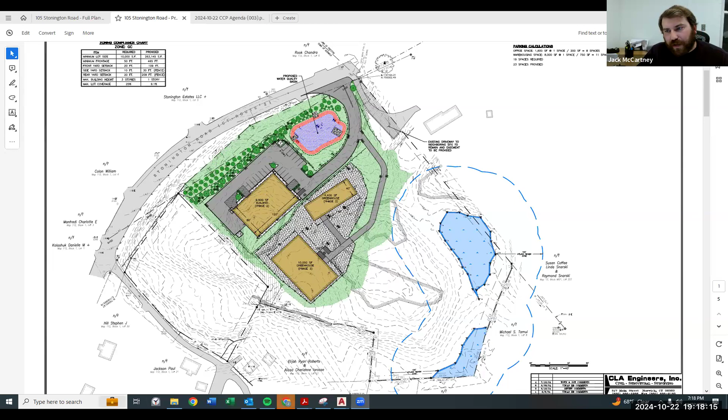But Jack, if you didn't mind showing where that landscape buffer reduction was. Yeah, we actually were not- did you end up not needing that? Yeah, at the last meeting, I thought we- it was a carryover from my previous memo. Yeah, if you see, we pulled the whole building and the parking lot back and we were able to get that 50-foot buffer.

Okay, thank you. And then sheet 4, did you address that dumpster and enclosure on the site plan for the phase 1? Yeah, we got the dumpster enclosure on here. I uploaded the plans to the portal, I think 2 or 3 days ago. Okay, thank you, I'm sorry I missed that. So those items from this memo have been addressed.

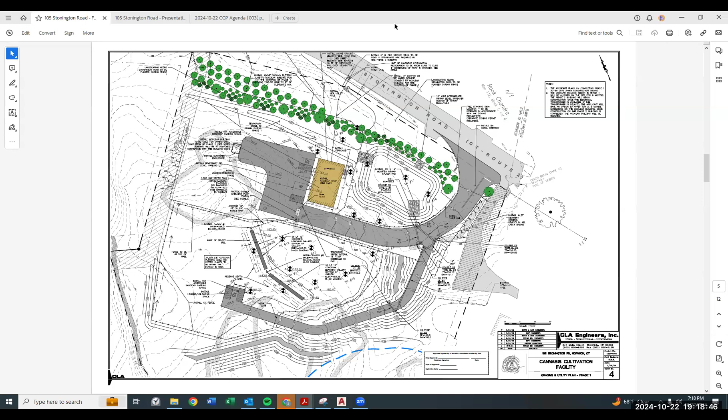So that's it. What about Mr. Bo? We're going to talk about the fertigation issue.

Yep, I will share my screen again so I can go through a letter. I'm just curious if Preston is represented here tonight. I am here. I'm gonna speak. You're not gonna let me speak. And I'm just wondering, because you moved up to the fertigation plan, okay.

Have all the issues in the Preston letter, have they all been addressed already? Preston had responded to the last iteration of their memo and had comments, and then Connie, this is what she's trying to do now, is address them. So this is where she's at. So the commission has the authority to determine whether those have been addressed or not based on what she provides.

That'd be memo 4. In my memo 4, which talks about number 4, was that to provide additional information in response to what you were hearing. Well, I think it needs to be clear for the commission that those concerns that Jerry has brought up are concerns of the town of Preston. They're not requirements of our zoning regulation. Only that you meet standards, certain standards, but you have to determine if the applicant has met those standards or not by what they're providing. So what I'm saying is, just because somebody raises an issue doesn't mean it's something that is not in compliance with our zoning.

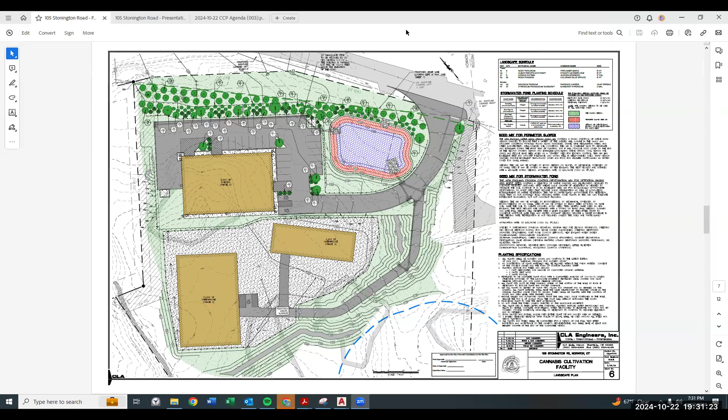Any other questions? Anything else from the applicant? Okay, so now, is there anybody else wishing to speak in favor of the application? Anybody else wishing to speak in favor? Okay, anybody wishing to speak in opposition to the application?

I'll speak in opposition to the application. My name is Jerry Gavarik. I'm also a selectman in the town of Preston, a lifelong dairy farmer, and own property one property away from this proposed marijuana grow facility. I took it upon myself to contact the town of Morris's first select person, Thomas Waite, who was also a former family farmer like myself.

He told me that for 3 to 4 weeks, when the plants are blooming, it's like 20 skunks are squished on the highway in front of your house—that's what it smells like. And I have to believe the guy; this is what he told me, why would he lie to me? He said an adjoining property owner next to that site is afraid she wants to sell a house, and she's afraid she can't sell it because the odor is so bad.

It's bad for about a month out of the year. I know it's not going to be odor all the time, but for these people to get up there and say there's going to be no odor—when I asked them about the aromatic plants to offset the smell, he laughed. That's what his response was. The first selectman of Morris laughed.

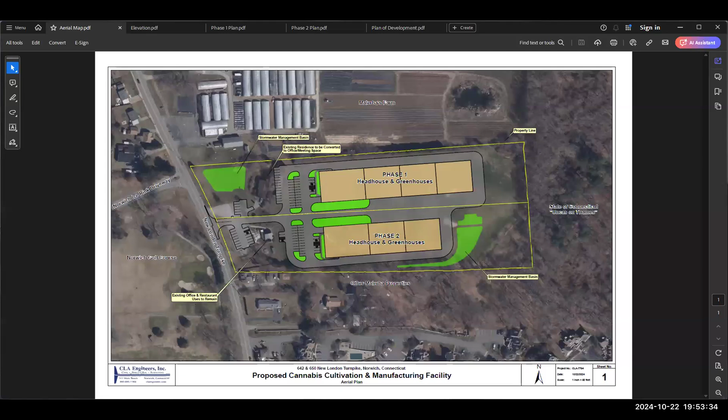Here tonight on behalf of the applicant, Turnkey Real Estate. If I could share my screen, I can show some exhibits to you guys. Sure thing, go ahead. Can you guys see that? Not yet, not yet. Okay, it's up on the screen now. Okay, perfect, thank you.

As I said, I'm Kyle Haubert from CLA, here tonight on behalf of Turnkey Real Estate LLC, the applicant for this project, here tonight for proposed advanced manufacturing and cultivation of cannabis products. The project will be located at 642 and 650 New London Turnpike, which are these properties right here. To orient you guys, New London Turnpike is running down the left side of the sheet here.

The properties are 4.9 and 4.92 acres respectively, currently used primarily for Malerba's driving range. That would be the bulk of the property here. You also might be familiar with the Millie's ice cream shop, located in this building right here. There's also a rental residence located right here on this property as well.

Surrounding the two parcels, to the north we have Malerba's farm - you can see the farm fields and greenhouses. To the east is a property of the state of Connecticut, the Uncas on the Thames complex. To the west there's a portion of the Norwich Golf Course as well as the Norwich Ice Rink. And finally, to the south are other properties of the Malerba family.

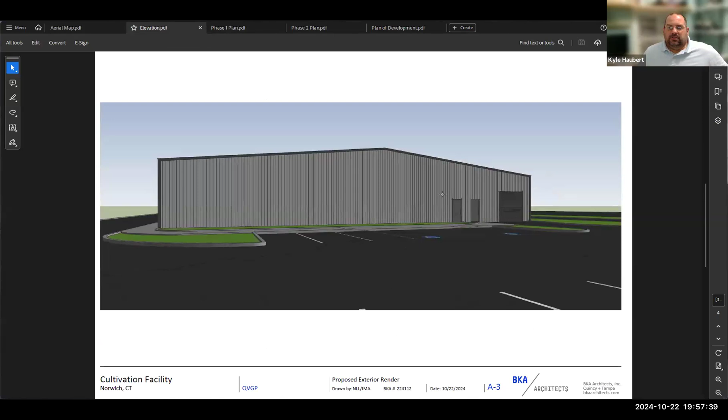I can show you a rendering of the building elevations for phase 1. You can see the front end would be a metal building. This would be the main loading access to the property and building, as well as man doors for entering and exiting. This is the facade of the building facing towards New London Turnpike, and then the row of greenhouses further behind the head house - this would be the head house here in the distance.

Phase 2 of the project would be very similar to phase 1. The head house would be an identical building located to the south of the phase 1 development. The only difference is that phase 2 would only have 2 greenhouses stacked behind the head house.

In total, all the buildings, including a reuse of the existing buildings, are about 99,180 square feet of building. I'd like to note that all of the growing operations will be done indoors within these greenhouses for both phase 1 and phase 2.

After I go through the site plan and step through it, I'll pass to Michael Pierpont and David Weber from Quinnipiac Valley and Turnkey Realty, and they'll go over some of the operations and how their operations work within their buildings.

I'll go through access to the site. This would be the main access, here to the west off of New London Turnpike. We have relocated the driveway entrance slightly south from where it exists currently for the driving range and the ice cream shop, for 2 reasons: this allows direct access straight through the site for the facility, and shifting the entrance south improves the sight lines when exiting the driveway. If you're familiar with that area, looking south there's a relatively short sight line now, but moving this driveway further south expands that sight line so we can meet the guidelines.

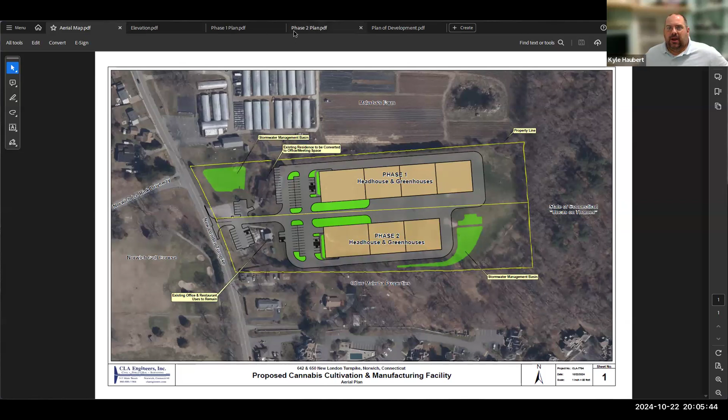On this aerial map: stormwater from the north, from Malerba's farm, as well as from the east along the steep embankment on the state property for Uncas on the Thames, all flows through the property and is directed to a low point about midway down the southern property line. What we've proposed is to collect and divert the stormwater from those surrounding areas. Stormwater from the north and east will be collected in a 5-foot wide grass swale that will divert that flow around the development to the southern property line, just like it does now.

This basin has riprap plunge pools at the discharges from the stormwater systems to help slow down velocity and capture that first flush of sediment. There's also a forebay worked into the system here, again to cleanse that initial first flush of sediment and fluids that run off from the parking lot. That stormwater then continues to filter through the remainder of the water quality basin to a discharge area at the southern property line, right about the same location where stormwater currently exits the site and continues southerly.

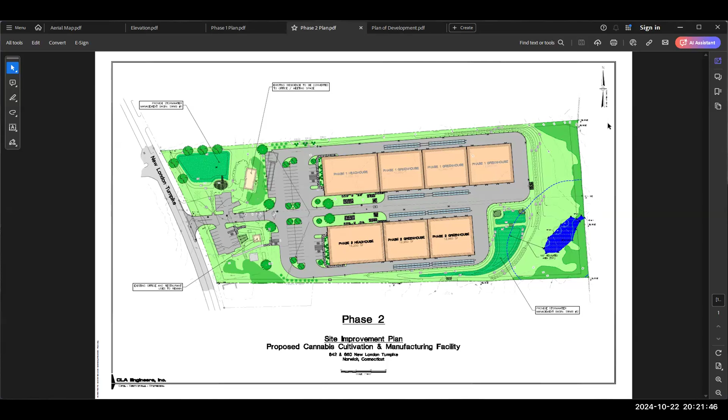Let me see. Or I can bring them up if you need me to. Yeah, would you mind, Dan, if you have those handy? Yep.

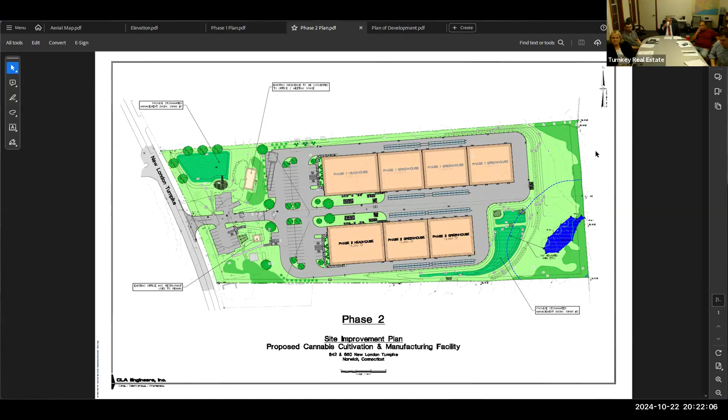Perfect, thank you. The first item in the special permit criteria, 7.7.6.1, the proposed use must be consistent with the current Norwich Plan of Conservation and Development.

The proposed development is consistent with this. It provides for aesthetics, lighting improvements, and the parking facility will reduce visual and parked vehicle clutter along the London Turnpike, consistent with the planning themes. Additionally, it will provide additional value to the grand list, which will generate additional funds usable for municipal projects and the school system within Norwich. The facility offers competitive pay, stable employment, and training opportunities, which help Norwich develop its nascent cannabis business community.

The next section, 7.7.6.2: the location, size of the site, nature and intensity of the operation involved and conducted in the use, and the location of the site with respect to the streets giving access to it, must be such that the use will be in harmony with the appropriate and orderly development of the district in which it is located and will promote the welfare of the city.

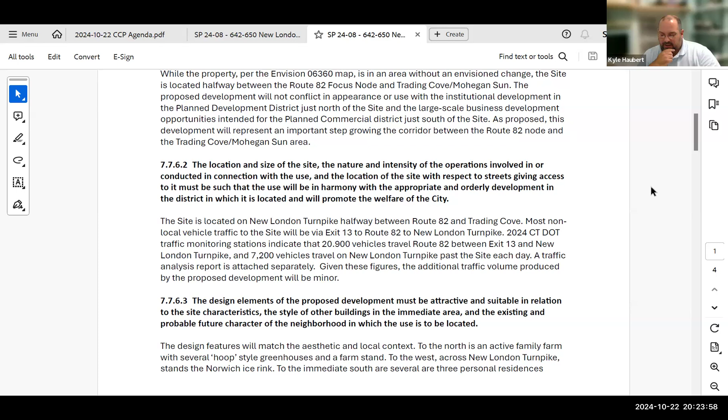Firstly, the site's located on the London Turnpike between Route 82 and Route 32 and Trading Cove. New London Turnpike has more than enough vehicle capacity for the site and for the proposed use. It's also in harmony with the neighborhood. You'll remember back at the aerial plan that I had, the Malerba's farm and farm stand is located just north, which is a very similar use to the cannabis facility.

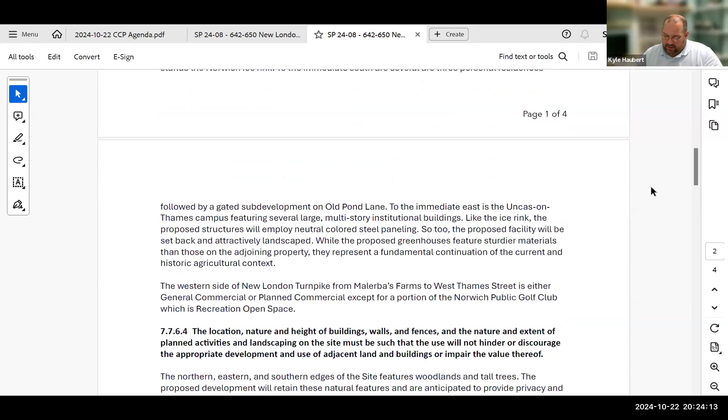The next section, 7.7.6.3: the design elements of the proposed development must be attractive and suitable in relation to the site characteristics, the style of the buildings in the immediate area, and the existing and probable future character of the neighborhood in which it is located.

Again, the design features: it's a greenhouse space, it's a metal building. The Norwich ice rink across the street is a metal building. Also, the greenhouses at the Malerba's facility to the north of this are very similar in characteristics. So this is not out of character and fits in with the character of the neighborhood.

The location, nature, and heights of the buildings, walls, fences, and the nature and extent of the planned activities and landscaping on the site must be such that the use will not hinder or discourage the appropriate development and use of adjacent land or buildings or impair the value thereof.

Again, this building and facility meets the character of the neighborhood. The height of the building will be about 22 feet at the peak, so it fits in with the surrounding buildings and the scale of buildings around it. To the north is the Malerba's Farm, and to the east is a steep embankment that's heavily wooded, belonging to the state and the Uncas on the Thames property. So development on this site does not inhibit any development or impair anything elsewhere or impair the value of anything surrounding.

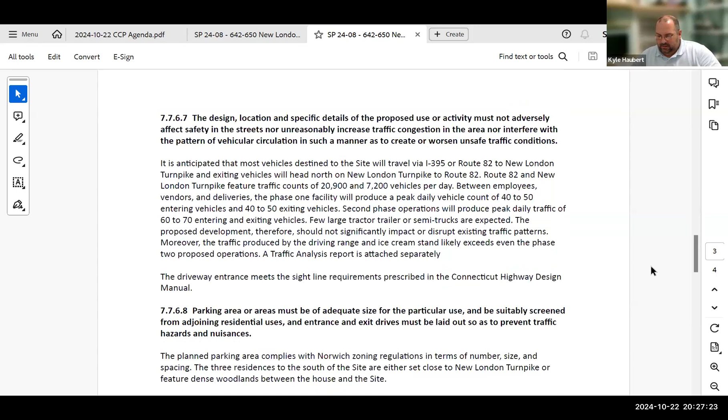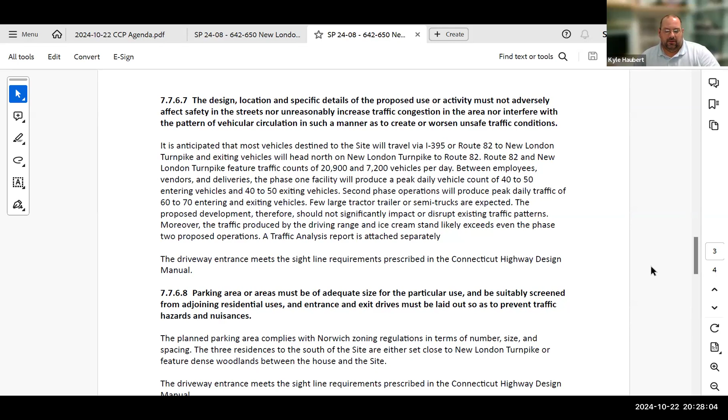Next, the design, location, and specific details of the proposed use or activity must not adversely affect safety in the streets, nor unreasonably increase traffic congestion in the area, nor interfere with the pattern of vehicular circulation in such a manner as to create or worsen unsafe traffic conditions. As previously noted, we have provided a traffic analysis that indicates the anticipated number of employees and trips per day on New London Turnpike, and it found that there's no negative impact on traffic there. The entrance drive has been designed with radii on all corners to allow for traffic and trucks to enter and exit the property.

The parking area or areas must be of adequate size for the particular use and be suitably screened from adjoining residential uses, and entrance and exit drives must be laid out to prevent traffic hazards and nuisances. As I just noted about the entrance drive, there are adequate radii on each corner to allow safe traffic in and out of the parking area. The parking area is designed to meet zoning regulations—the number of spaces and sizes of the parking spaces meet the zoning regulations. We've provided screening within and around the parking area with landscaping, and we've tried to preserve the natural mature landscape that exists around it as best we can.

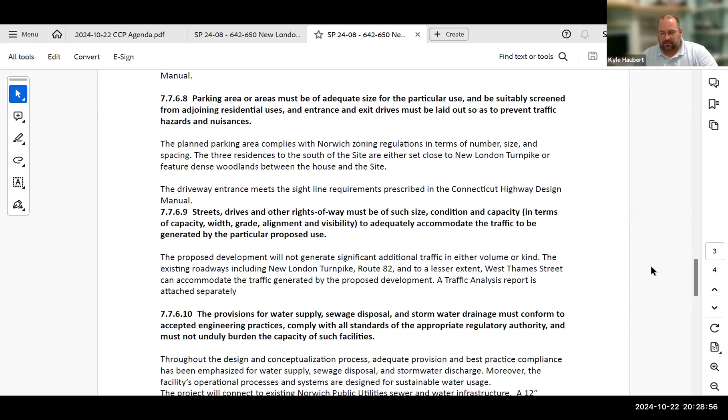Next, streets, drives, and other rights of way must be of such size, condition, and capacity in terms of width, grade, alignment, and visibility to adequately accommodate the traffic generated by the particular use. Again, the direct exit from the facility onto New London Turnpike—we've run the traffic analysis on that—shows it has more than adequate capacity to handle the development, as well as the roads further down, whether it's Route 82 to the west or Route 32 to the south. Both of those state roadways have more than adequate capacity to accommodate any of this development.

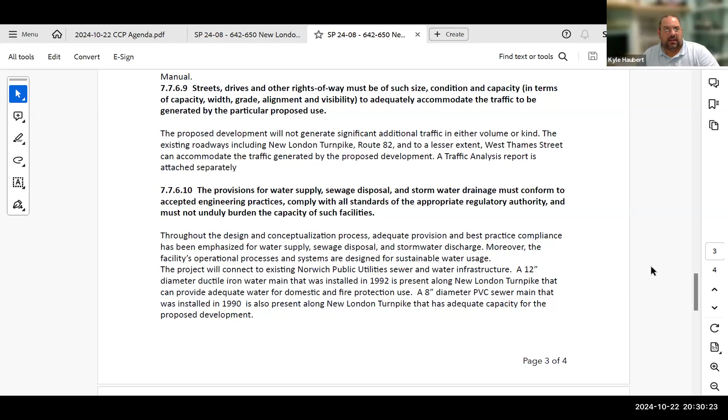Next, the provisions for water supply, sewage disposal, and stormwater drainage must conform to accepted engineering practices, comply with all standards of the appropriate regulatory authority, and must not unduly burden the capacity of such facilities. Again, Norwich Public Utilities has sewer, water, gas, and electric facilities in New London Turnpike. They have reviewed these plans, and there is capacity for this development with the utilities. We've also done the stormwater drainage analysis, which complies with both the city and the DEEP 2024 Stormwater Quality Manual, and the city engineer has reviewed and approved those stormwater measures.

The proposed use must provide easy accessibility for fire apparatus and police protection, and must be laid out and equipped to further the provision of emergency services. We've laid out the driveway as basically a straight shot from New London Turnpike directly into the facility. The gate will have automatic permit for emergency access for fire, police, and ambulances to reach the facility. We've also provided a hydrant in the middle of the parking lot for fire apparatus to tie into should a fire occur, and there's more than adequate width of the travelways around the buildings for emergency vehicles to fully circle the buildings in both phases.

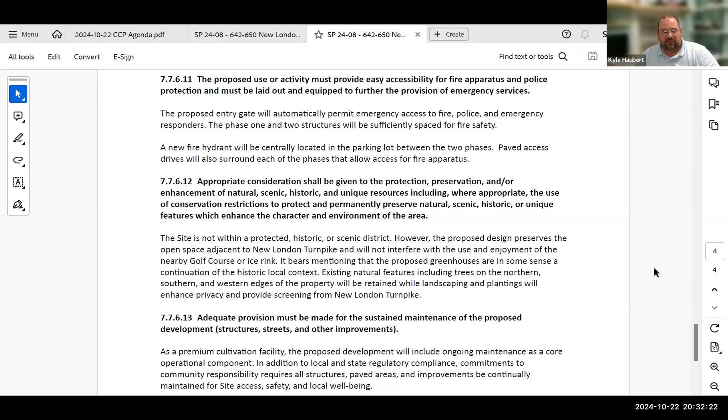Appropriate consideration shall be given to the protection, preservation, and enhancement of natural, scenic, historic, and unique resources, including, where appropriate, the use of conservation restrictions to permanently preserve features which enhance the character and environment of the area. The site is not within a historic or scenic district. It's historically been used as an open space driving range, primarily with a restaurant and a small residence on site. We're trying to preserve the mature vegetation on site and will provide additional plantings to enhance and provide screening from New London Turnpike and the surrounding areas.

Finally, adequate provisions must be made for the sustained maintenance of proposed development, structures, streets, and other improvements. The applicant and the facility are committed to ongoing maintenance as a core operational component, in addition to local, state, and federal compliance for all operations and maintenance of the facility.

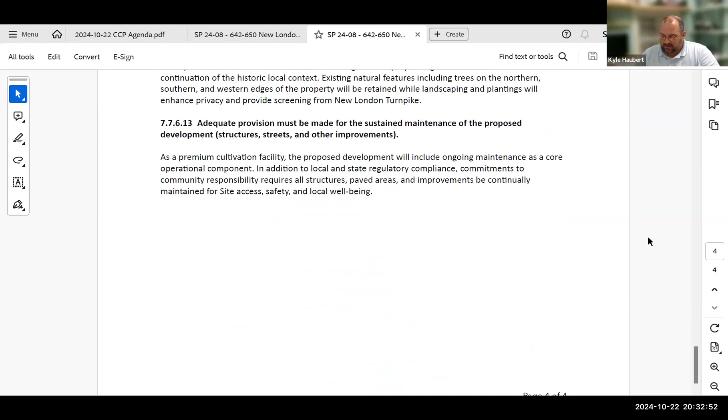Thank you. Thank you. Take another break there. Appreciate that.

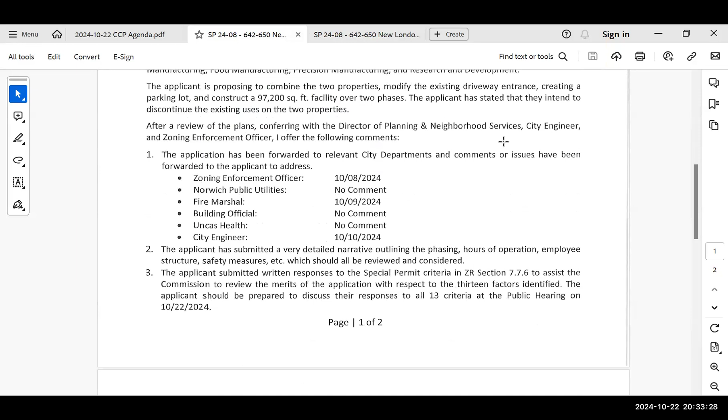Anything else from staff? I'll just go through my memo real quick. It was referred out to other departments for comment, and all comments have been addressed, or I received a comment of no comment. As Kyle and the applicant team outlined, they had a very detailed narrative covering phasing, hours of operation, and safety. Kyle went through all the responses there. We do have the hard copies of the proof of mailing.

The site is located within a highly sensitive area for archaeological resources. It's been previously disturbed, so it's not anticipated to be an issue, but we noted on the plan set that if anything is found, we must be notified immediately for further instruction and evaluation.

There are no waiver requests for this application. Should someone decide to make a favorable motion relative to the application, I have a number of bullet points I'd appreciate you including in your motion, and I've suggested reasons here as well. I can bring up the exhibit list to add to the record.

Here is the exhibit list for everybody to take a look at. If we're all satisfied with the exhibit list, can somebody make a motion to waive the reading?

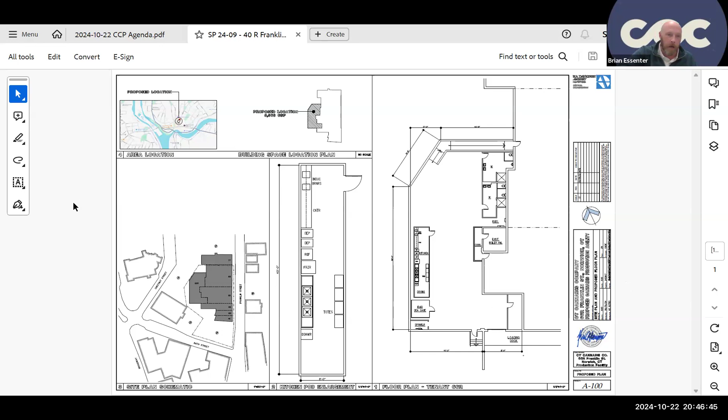Go ahead, Brian. Oh no, sorry. So yeah, I mean it's really kind of that simple. We're going to have the kitchen pre-made off-site. It's going to be sent on a trailer and moved in with a forklift. The DEA cage will be sent in 5 pieces, the sides, the top, and the door, which will be put together on site as well. The office space you can see to the bottom right is what we'll be using for our office space down there. Otherwise, all of our production will take place in the kitchen and in the DEA cage as well.

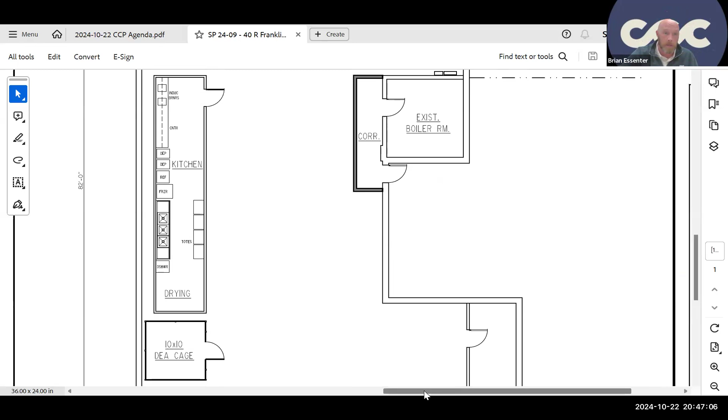So in the kitchen, our only plan at this point is to be making gummies. We're not planning on making any other food products. We will not have any open flames. We're only planning on using about 3 to 4 gallons of water that will all be going right into the gummies, so we're not anticipating any waste or anything like that. There will be a grease trap installed on the connection to the plumbing as well, just to ensure that nothing is entering the water, and there really shouldn't be any other waste that we have.

We are not going to be cultivating anything. We are not going to be selling anything. So there should not be any issues with odor mitigation of any sort. We are planning on putting in odor mitigation as well, but we don't expect that to be any kind of an issue with anything that we're making. This is much more of a kitchen than a cannabis facility.

Okay, anything else you want to tell the commission? I don't believe there's anything else.

It's really pretty simple. Any cannabis products coming in would be in the form of an oil, which would go directly into our DEA cage and our refrigerator there. We shouldn't be having a significant number of deliveries.

We only have about 5 to 7 employees, so it shouldn't affect any traffic or parking or anything like that. We're not doing anything with the outside of the building, so there should be no changes whatsoever to any runoff or anything like that either.

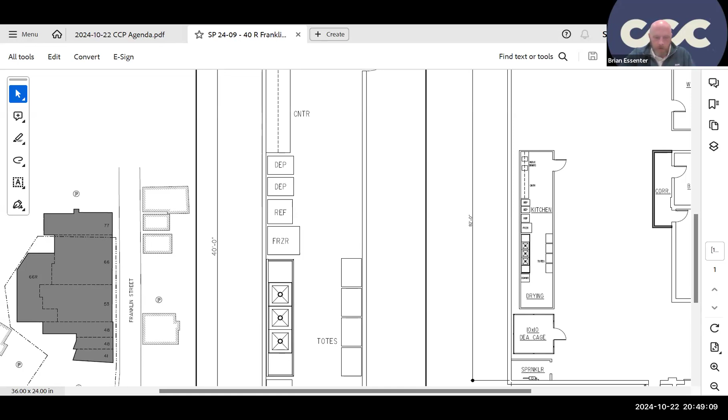So going through the waiver request documentation. Section 1 was the bond estimate. In accordance with the applicant's described use and minimal intended alterations, only the inside of the facility is going to be applicable. It is not anticipated or reasonably foreseeable that any of the following will be applicable to the tenant's use.

That includes any installation or maintenance of erosion or sedimentation control, restoration of site to a pre-construction condition, site improvements needed to ensure public safety and site access, including sidewalks, roads, lighting. We shouldn't need any drainage improvements, maintenance of erosion and sedimentation control, and there shouldn't be any site cleanup of debris, abandoned vehicles, or any other material that would cause a deterioration of the condition in the area.

Section 2, copies of the drainage calculations. We ask to waive that because, as described above, we will not be making any material alterations to the building, nor is it anticipated that we will require material amounts of water or other liquids. Any water or liquids will be incorporated into the applicant's final finished products. The consumption of drainage water is anticipated to be supported by existing infrastructure and less than the previous use of the space.

The previous use was a gym, which also had some showers in there as well, and less than that of any other neighboring tenants, such as the brewery or anything like that. As such, we are not having any additional impact on the provisions for water supply, sewage disposal, or stormwater drainage. And as such, do not feel that we should be burdened with the color renderings of the elevation.

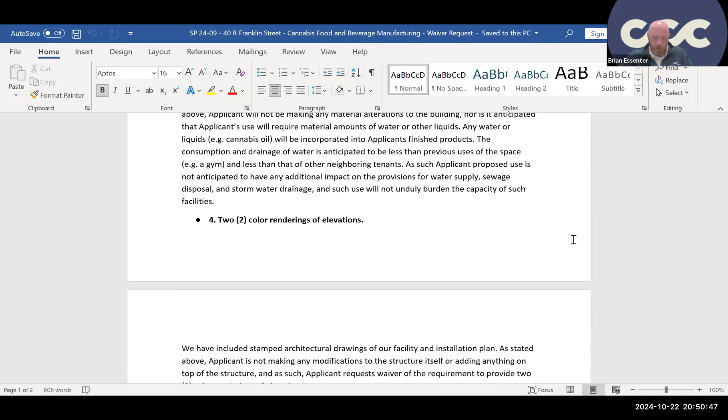So we have included the stamped architectural drawings of the facility and installation plan.

We are not making any modifications to the existing structure or its facade, or adding anything on top of the structure. As such, we request a waiver of the requirement to provide 2 color renderings of the elevations.

As such, we request a waiver of the requirement to submit a site plan, and the architectural drawings of the interior plans for the space submitted with this application suffice as the site plan.

The elevation drawings of the proposed buildings and details for all signage. So we request that the commission waive the requirement to include elevation drawings of all proposed buildings and details for signage.

We will not be building any structures at the site, nor erecting any signage outside of the site at this time. Number 8, letters from the city engineer, Connecticut DOT, or copies of permits received, such as variances, special permits, wetland approvals, or outside agency approval.

Pursuant to section 7.5.2.4 of the regulations, we request that the commission waive the above requirement if applicable. However, the applicant does not believe any outside agency approval is required for its use and installation of the type referenced in this application.

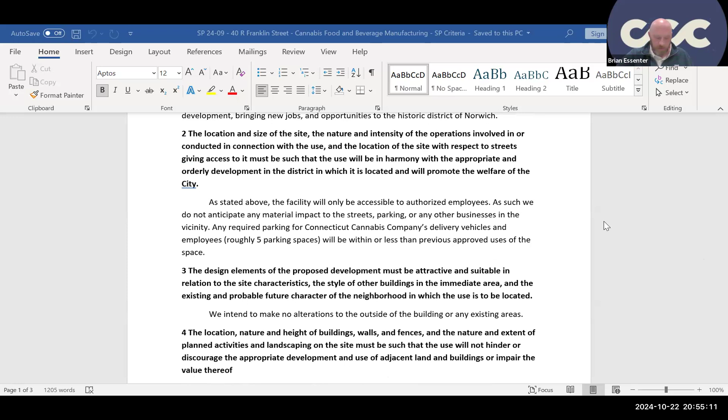Number 3, the design elements. We intend to make no alterations to the outside of the building or any existing areas. Number 4, the location nature. Again, we don't intend to make any alterations to the outside of the building or any existing areas.

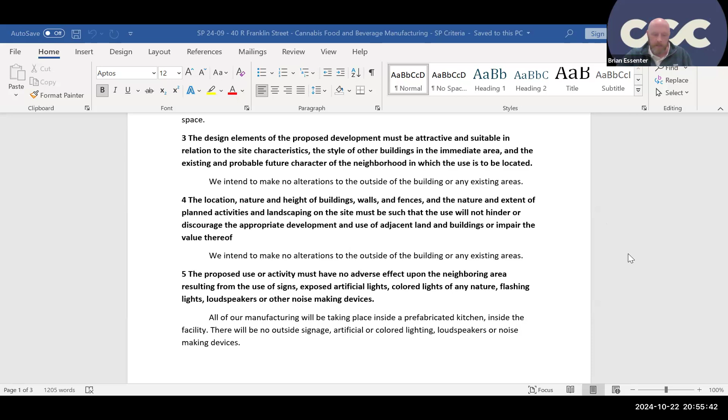Number 5, all of our manufacturing will take place inside the prefabricated kitchen inside of the facility. So again, there will be no outside signage, artificial or colored lighting, any loudspeakers, or any loud noise-making devices. Number 6, our manufacturing will be taking place inside the prefabricated GMP standard kitchen, so again, no existing structures will be adapted or converted for our use.

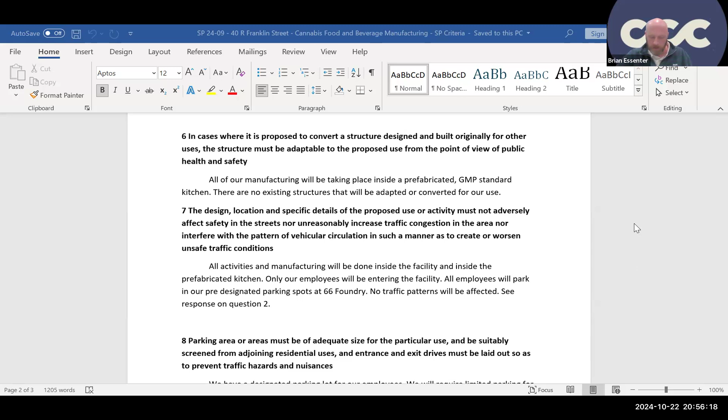Number 7, all activities and manufacturing will be done inside the facility and inside the prefabricated kitchen. Our employees, which should only be about 4 to 5 people at a time, would be entering the facility. All employees will park in our pre-designated parking spots at 66 Foundry, and no traffic pattern should be affected.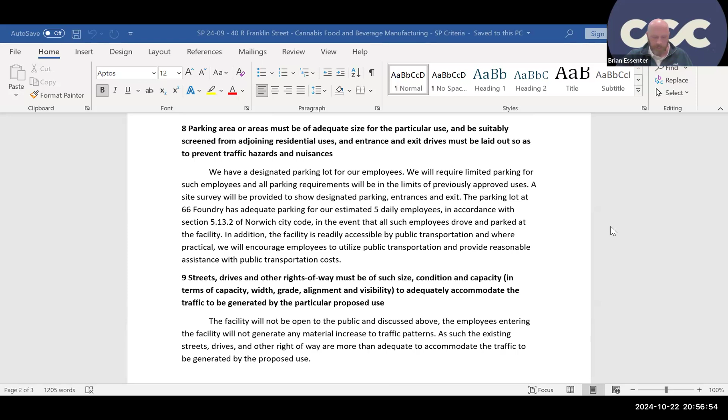Number 8, we have a designated parking lot for our employees. We will need limited parking for such employees, which will be similar or less than the parking provided previously approved, in accordance with section 5.13.2 of the Norwich zoning regulations, as such employees drove and parked at the facility. In addition, the facility is readily accessible by public transportation, and where practical, we will encourage employees to carpool and/or utilize public transportation and provide reasonable assistance with public transportation costs.

Number 9, the facility will not be open to the public as discussed above. The employees entering the facility will not generate any material increase in traffic generation from prior conditions. As such, the existing streets, drives, and other rights-of-way are more than adequate to accommodate the traffic to be generated by our proposed use.

Number 10, we anticipate that we will be using only about 3 to 4 gallons of water per day for all operations, materially all of which will be consumed in our products. We will use the existing water supply, sewage disposal, and stormwater drainage. We will install a grease trap in our drain to prevent any cooking oils from entering the draining system, and far less water would be used for our purposes than any previous usage by neighboring businesses.

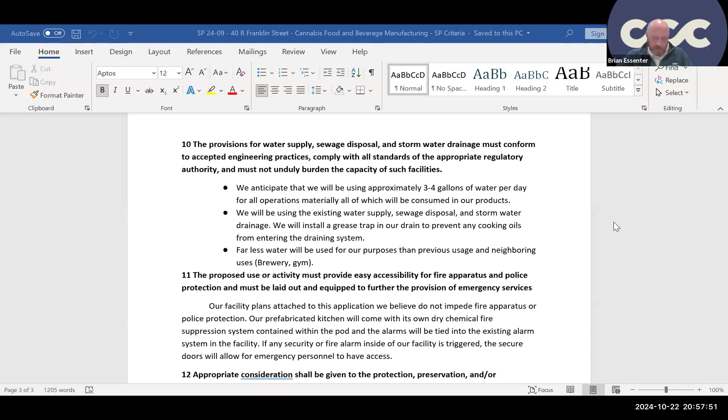Number 11, our facility plan is attached to the application. We believe we do not impede fire apparatus or police protection. The prefabricated kitchen will come with its own dry chemical fire suppression system contained within the pod, and the alarms will be tied into the existing alarm system in the facility. If any security or fire alarm inside of our facility is triggered, the secure doors will allow for emergency personnel to have access. Number 12, we do not intend to alter the exterior of the building or impact the natural, scenic, or historic and unique resources of the Chelsea Central District.

And number 13, outside of the building, the landlord is providing existing services such as landscaping, snow removal, and general upkeep, as it does for all tenants of 66 Foundry. Inside the building, no changes will be made to the existing facility that will require sustained maintenance. All of our equipment will be prefabricated and installed by professionals. We will maintain all manufacturing equipment in accordance with GMP. The Department of Consumer Protection will oversee compliance with all state regulations.

And just one more thing, the state of Connecticut Department of Consumer Protection does require us to actually have 2 separate alarms. We have an external alarm, which has an auditory portion of it, and an internal alarm, which has like a silent alarm for any sort of robbery or anything like that.

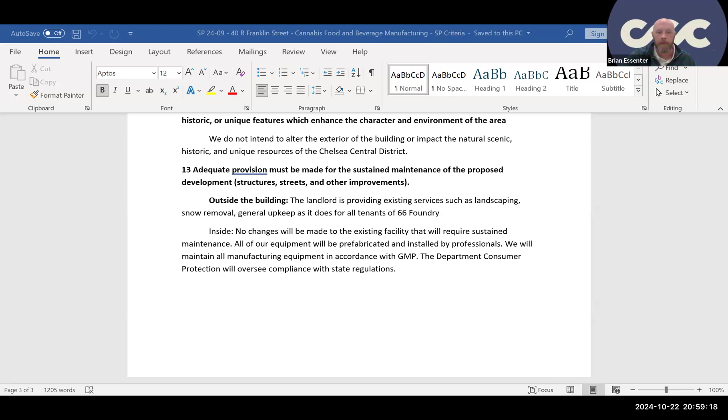Anything else? I believe that's all I have. If anybody has any questions, I'm happy to answer. Any questions from the commission?

Does anybody else wish to speak in favor of the application? Anybody else wish to speak in favor? Okay, hearing no response, anybody wish to speak in opposition to the application? Anybody wish to speak in opposition?

Hearing no response, I would then ask at this point to address the waivers that are requested. Frank, if you don't mind, if I can go through. You want to do your quick memo?

Not much to add here. I received comments of no comment from everyone: CEO, MPU, fire marshal, building official, Uncas Health, and the city engineer. Brian just went through the detailed narrative. He did submit waiver requests for a number of items that you need to act on. First, just went through the special permit criteria. I do have the copies of the mailing, and I do have some suggested conditions here and a suggested reason. I'll also share the exhibit list just to get that out of the way.